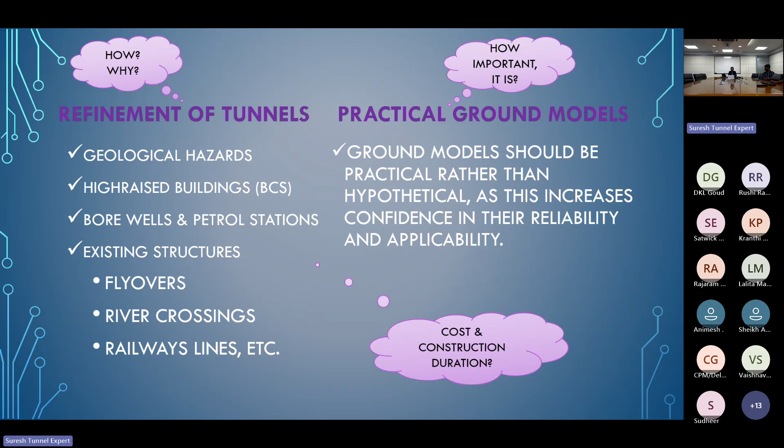Dear friends, never think this is not our cup of tea being a civil engineer. Not at all. My experience says once you're good at primary things like geological hazards, firstly work those out. Let me give you a few examples like faults, folds, bedding planes, thrust. These are all part of hazards, the first geological hazards we are able to identify. We cannot simply say this is entirely the geologist's job and I'm not interested. This is also part of our job. Being a civil engineer, we have to identify those things.

Afterwards, let me go to the second chapter. Why? Because the tunnel alignment always interfaces with geological hazards. Let me give another example: if our fault axis is in an upward direction and our tunnel axis is in a different direction, and if it is parallel, it's not at all safe. The reason being, in the IS codes and European codes as well, it creates massive surprises, the rock gets crushed and cavities take place. Such cases you primarily have to identify, and accordingly find the alignment.

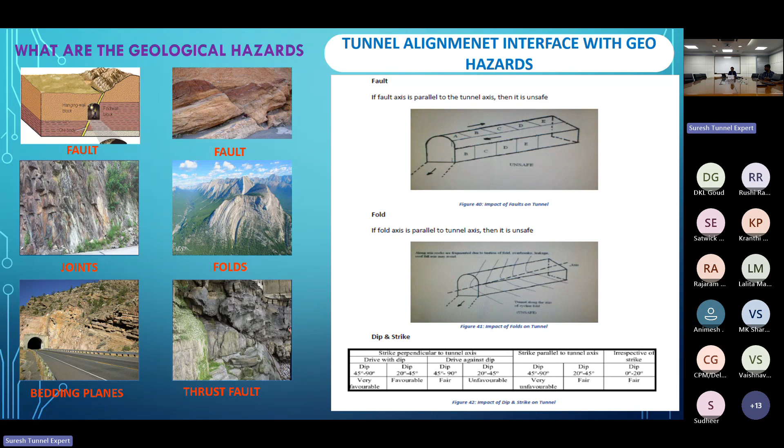The next question is how to refine the tunnel alignment when there are so many geohazards. This is something we can do completely in-house. There are two things we can do: one can easily download GIS district resource maps from the GIS website, or we can buy it.

Identify all the geological hazards where we've done the geological groundwork. Then use QGIS software to refine it and identify all the major geological hazards like landslides, faults, shear zones, and most other geological hazards at this level. This is completely in-house work we can do.

Once that is done, the next step is geological mapping. This is very key and is the backbone of the work. It's the most important thing for tunneling as well. The reason being, when we assume something, we work out something, but what actually happens at the site level may differ. The experts go and identify all the things through geological mapping, and they give good GPS coordinates, and accordingly we proceed.

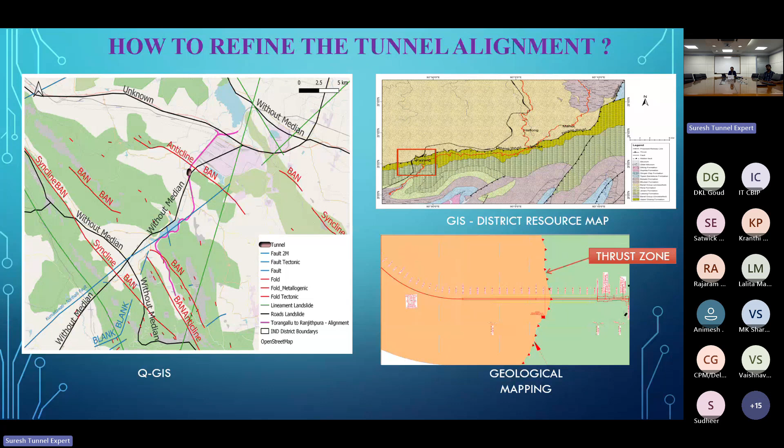That is primarily what an engineer is supposed to identify - that's part of NATM. Now let's move to the TBM cases.

As I said earlier, most TBM routes pass through infrastructure like flyovers, rivers, and bridges. For example, I encountered this somewhere in a metro project, where literally both our tunnels passed underneath a bridge, a flyover which was a very aged bridge - this is the configuration we encountered. Then the client said, please refine the alignment.

Then what I do is simply say I have three options: one is the analytical, another is a closed form solution, and the final one is a numerical one. This is the only alternative we can do. We try to use any one of them, especially numerical analysis, where the FEM plays a big role. Why?

Because if there are two tunnels, we cannot generate CFS equations to get good results. That's the reason there's no doubt numerical FEM analysis prevails in such cases. Now moving from geologist to engineer - we cannot expect a geologist to do this kind of refinement, so being an engineer, we're supposed to do these things.

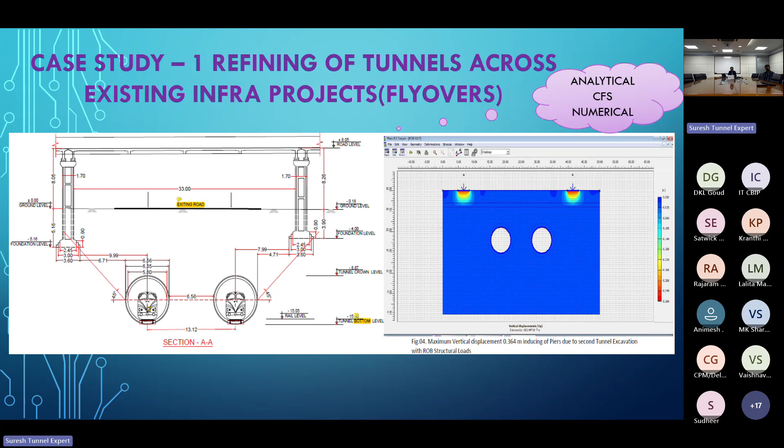Other one is, as I said earlier, not only tunnels but cut and cover is also part of us. Cut and cover and underground stations, these are all part of us because we are all underground structures. We cannot stick to only tunneling; cut and cover is also part of us.

Cut and cover means cuts depend upon the depth criteria or diameter of the tunnel. When open cuts happen, especially in mountain areas, I believe we should try to avoid it. The reason being there's flash flood risk, among other reasons, so we cannot suggest open cuts. Instead, you may recommend cut and cover. This is what my experience says.

In such cases, primarily we are in a deeper stage also - we have to estimate what is possible and what is not possible. That is also part of us. This is the way we have to refine the cut and cover type tunnels and open cuts as well.

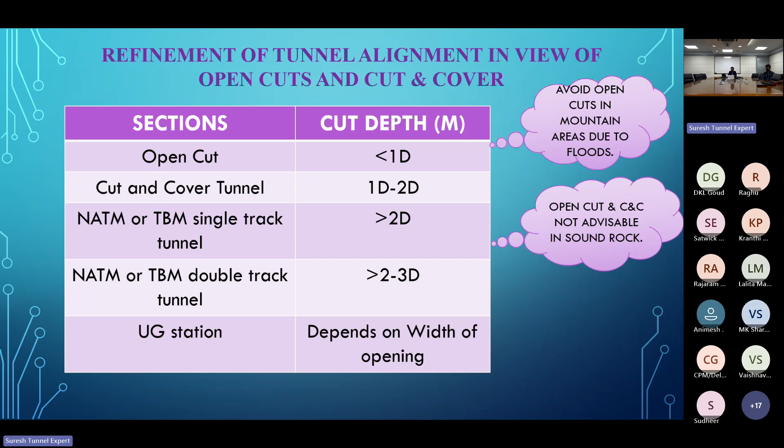This, my friends, is another case study for one of the metros. All of you who worked in metros know this - once the elevated corridor finishes off, then our underground starts with open cut or cut and cover. In very busy places where the density of people and buildings is more, and roads are very important, such cases we cannot put very long open cuts.

The reason being, if somebody recommends longer open cuts, we try to tell the client it's not feasible. Because of this open cut, we have to arrest everything - there's no people movement at all. Firstly, because it's open to the sky, and second, we have to divert the traffic. These are all issues one has to primarily consider when working on tunnel alignments or route alignment.

Dear friends, we should consider open cuts, cut and covers, and underground spaces, especially temporary structures. This is also part of us, so we cannot avoid these kinds of things. Especially cut and covers are literally possible.

Why? Because we cut it off, then we fill it off. Still, it depends upon the deeper cuts - we cannot do it like a double track cut and cover if that is massively required. Such cases one has to very carefully examine, and accordingly we have to refine the alignment. Thank you, other one please.

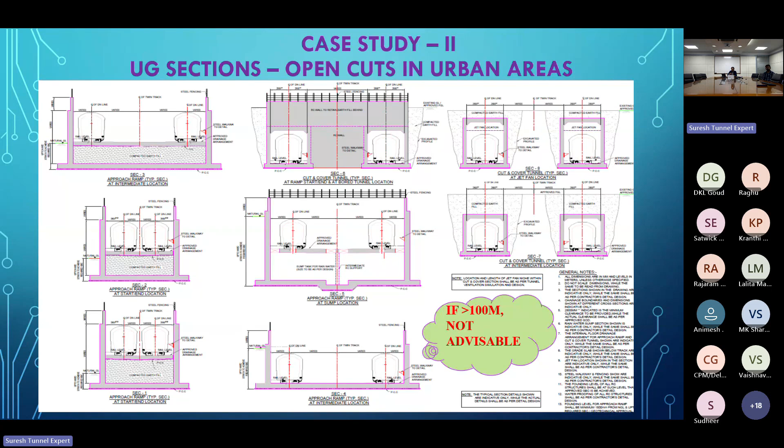I think so far I've covered how to refine the alignment. I hope it made some importance for that. Now I would like to go more into design, but structural precast segments and steel segments - those things I do not want to discuss at the moment. The basic things, how it works out, this is what I would like to emphasize now.

What I would like to say, dear friends, is NATM is design as you go. Nobody can guarantee or say their design is correct. The reason being, we usually use two ground models - one is Mohr-Coulomb and the other is Hoek-Brown for FEM analysis. Based on that, we give some support system. We design models - empirically we estimate, analytically we estimate, FEM we estimate, and yes, CCM also we can estimate.

So we're estimating something, and that has to be justified actually by the face log zone - meaning practically what the face log, the geological face map is, that is actually correct. So we have to change our design models. Practically, we have to agree that however good we are hypothetically, that plays a little role, but practically instrument monitoring also plays a big role. These are things we cannot avoid - we should completely rely on that.

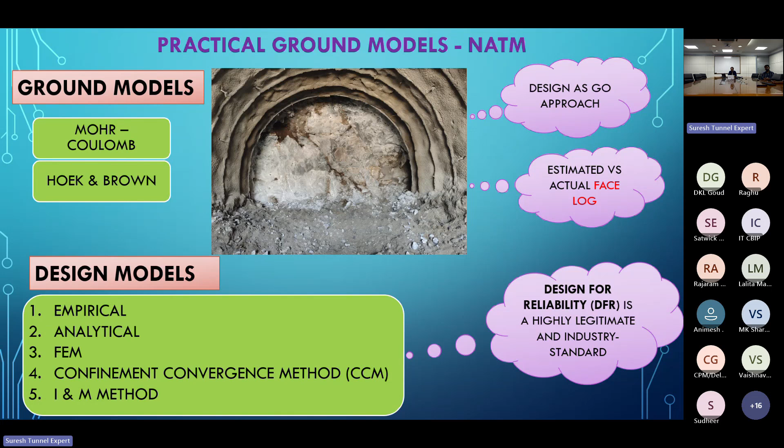So what I want to make a point of is: you design whatever hypothesis, but that has to be synchronized with your practical approach. Eventually you take a call such as instrumentation monitoring method. Let us say you design something. End of the day, the instrument monitoring during construction and post construction tells us exactly how the structure behaves. That is the reliability we are supposed to be able to establish. This is what about it.

Let me give one case study. Regarding this, I had a good discussion with a friend of mine, Mr. Rishabh Gupta, who is from RITES also. He is a very well-known tunnel designer. So we had a good discussion about these things.

Especially for tunnels, at the beginning of the tunnel portal, there are two things coming. One is we have to specially design for the tunnel portal class for a certain distance either side of the portal. Let's say for namesake, I'm given 5 or 6. Yes, this is well and good as an estimate, but practically when you go to the site, it may change. Are we still adapting what we designed? I don't think so. Safety is a paramount priority, but ground reality says different - meaning yes, that can be avoided. This is what my experience says.

What I say is from my experience - I'm not making it mandatory at all. This is what I would like to talk about. Especially young engineers, when they go for this, these are the things they have to notice - how to bring practicality into actual design and make it reliable. I'm again emphasizing reliability. Once you give confidence and reliability, then only the reliability factor increases. Then only will investors also increase investing more into infrastructure. If there is no reliability, we cannot expect more investors as well.

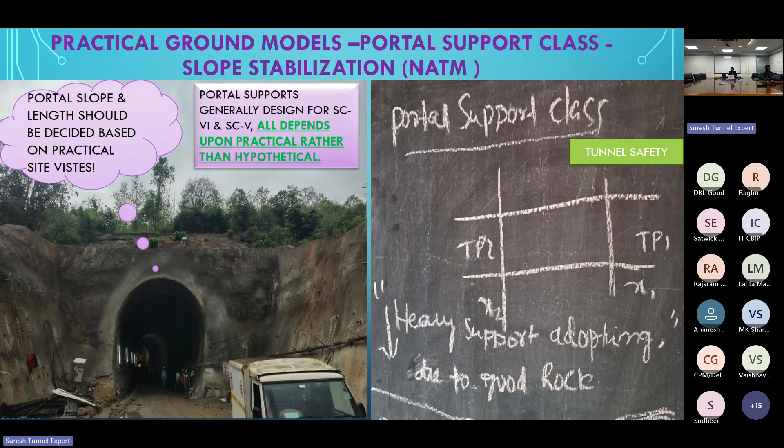Please go to the next one. This is a more sensitive slide, so we'll talk about it a little carefully. The reason being this is purely about TBM and underground stations. Dear friends, I've worked on both - one is TBM, one is precast segment. Usually we may see this in India. The other one is steel segments, like a steel segment.

When I was in London, I worked on underground tunnels for about 2 years. We used to inspect those tunnels, and then for reassessment we did the designs. It gives good experience, there's no doubt at all. The reason being, they did not use TBM, they used the NATM concept. And then they used instrumentation monitoring. So in such cases it works out.

But when you come to precast segments, generally instrumentation monitoring won't work because we cannot measure how much deformation is actually coming in the precast segment. The only option we have relates to other things like face pressure, volume loss and everything in the segments. In such cases, instrumentation monitoring also plays a big role, to a large extent, above the tunnel only - if the tunnel is not able to take any loads, then definitely the surface instruments can predict that, using MPBX and other instruments as well.

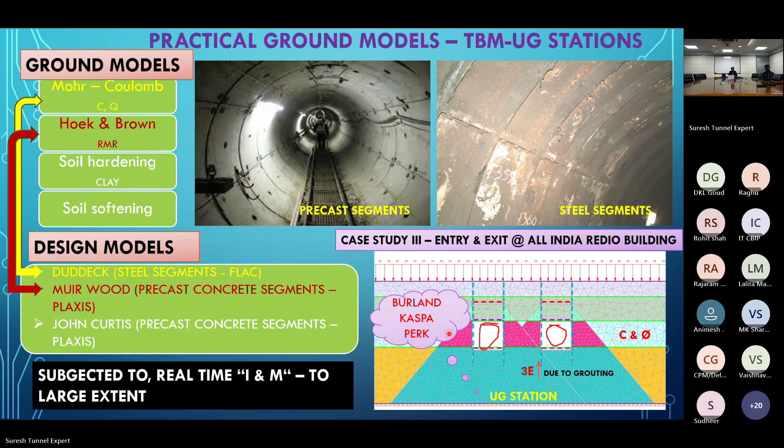As a tunnel designer, especially for NATM tunnels, face stability plays a big role. I would like to emphasize this in a tricky way, so please try to understand. Whenever there are C-phi soils, we normally believe there is a wedge model, developed based on the equation given by the engineers Broms and Bennemark.

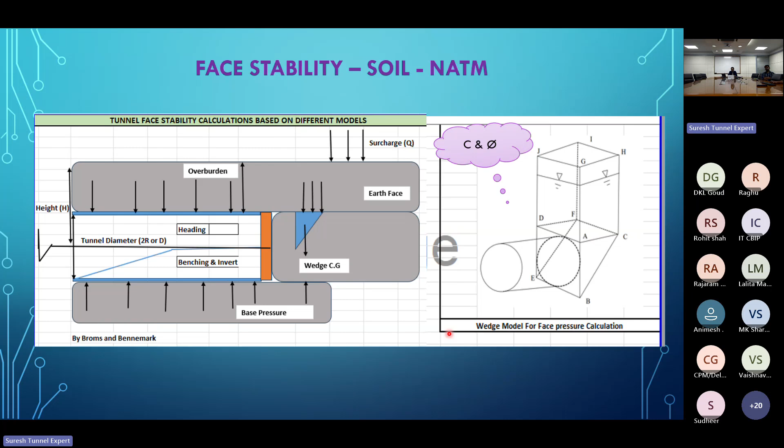Based on that, we estimate the face stability, how much length may get disturbed, or how much settlement may be induced. That's the wedge analysis for C-phi soils. For the cohesive soils, I used the Mair method, practically for one metro project case study. Eventually we got about 52 mm settlement, which was a little on the higher side. Generally we restrict vertical settlement to about 25 mm per code.

For underground stations, horizontal settlements we can allow up to 40, as some codes say, though that's from a UK perspective. Here you can prove it off too, and the best way to judge is through instrument monitoring. So what I want to point out is that face stability for NATM tunnels in cohesive soil works out using Mair's method. But what about when the rock strata comes?

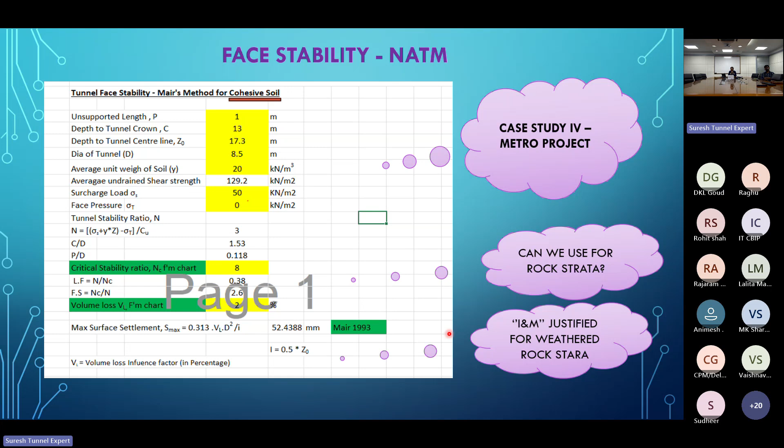In NATM, rock strata may come predominantly. In such cases, can I go for these equations? I would say rather no, especially for weathered rock strata conditions. You may presume certain values, but we still have to justify our presumptions with the help of instrumentation monitoring. Practically, one can only justify this using these techniques. That's what I wanted to tell about this slide.

Next, in case of NATM tunnels, face stability; in case of TBM tunnels, face pressure. Let me give a good case study here. Assuming a C-phi soil, I used Terzaghi's silo theory and estimated some face pressure. Literally, when I used that face pressure, we encountered massive settlements. So we rethought it and changed the model.

We changed to another model and used Anagnostou and Kovári. Then we got very good face pressure results, and the induced settlements reduced drastically. This shows everything is practical - if model A doesn't work, you move on to B. We can never stick to A only. So how could I say which is correct? The only option is tunnel deformation and instrument monitoring results.

In case of tunnel deformation or lining deformation, I may not guarantee full accuracy, but at least surface settlements we can justify using instrumentation and monitoring results. That's what I would like to say.

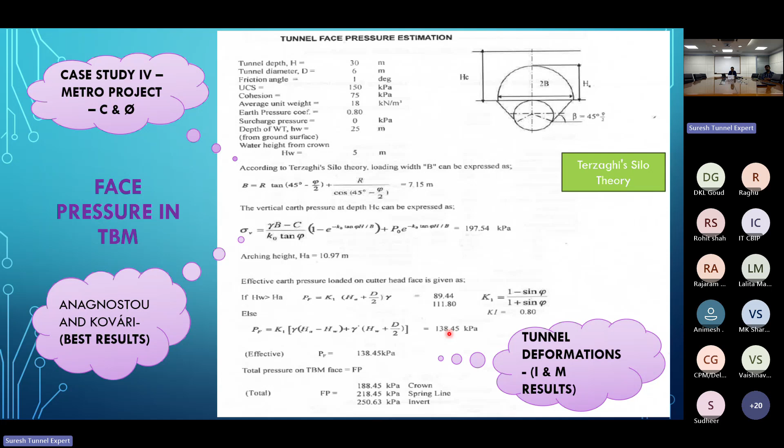Finally, when sticking with TBM tunnels, there are four parameters one has to design very carefully from a practical point of view. For example, designing TBM torque around 45,000 kilonewtons, we also have to estimate theoretically. The torque literally depends on the face pressure. Face pressure interlinks with volume loss, and volume loss causes settlement. So all these are synchronous and interlinked, and one has to estimate very carefully.

For example, for a single tunnel, I can use a closed form solution to estimate settlement and volume loss. But for a double tunnel or staggered tunnel, one should go with FEM only, because there's no other option - closed form solutions don't give good results when interlinked with multiple tunnels. That's what I wanted to tell about this slide.

Somewhere FEM prevails, sometimes real-time monitoring prevails. So eventually, what we design has to be mostly linked with real-time monitoring. This is how we give reliability to our designs. That's what I feel about it.

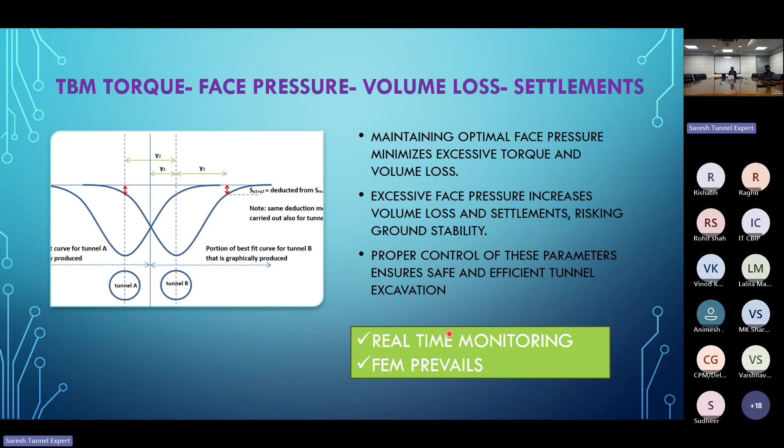I hope I made it somewhat clear, covering most of the massive and major design parameters, especially in case of NATM and in case of TBM. Thank you very much.

Volume losses - this is a very good question, a very repeated question. I've been there, but let me put it this way. Whatever back volume calculations we can do, how we do it means before you estimate something, you can consider 0.3 or 0.5, whatever.

So in any attempt you will go for 2%. But especially for TBM tunnel, when you assume something, let the tunnel mining go on. Then when you go to the site, we can take how much face pressure they were having. Then, through back calculation - knowing the face pressure and the settlement already - you will get the actual volume loss per ton. Actually, I'm having that slide, but I did not show it.

With the same thing, how much - say I'm designing thrust force also as 5,000 kilonewtons. But actually how much I'm using, you will come to know when you go to the site, because you take the value and can estimate based on how much face pressure they are actually applying.

So that's what I'm saying - you presume something, then one has to go to the practical site, go to where the mining takes place, take the values like face pressure values and re-estimate. Why? Because the volume of the tunnel we know already, especially for volume losses. What happens is the volume of the tunnel is known already - let us say 6.2, whatever, some meters per cum.

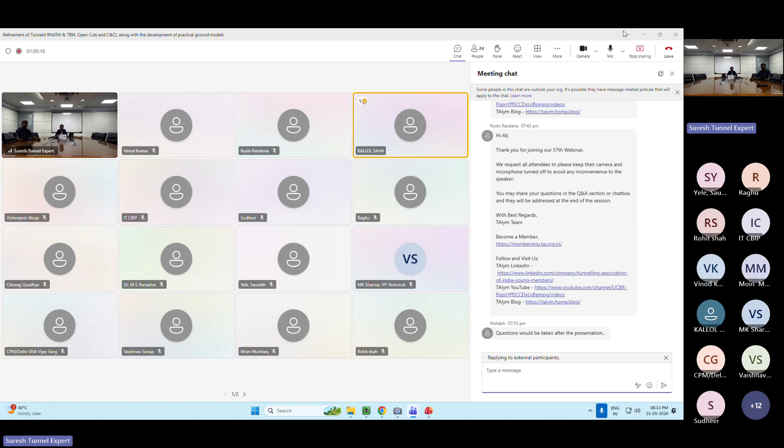So actually, you have correlated Hoek-Brown with Mohr-Coulomb, and then Mohr-Coulomb with Duddeck. So is there any reason - can I use Hoek-Brown with Duddeck, and is there any specific reason that you have correlated Hoek-Brown with Mohr-Coulomb and Mohr-Coulomb with Duddeck?

Sir, what is the reason this happens? Is there a compatibility issue coming? Let us say when you design, say c-phi soil - generally, immediately we go for the Mohr-Coulomb estimate.

For Duddeck case, normally where there is clay, Duddeck developed most of the cases in the London area, so they used that method. Whenever rock is coming, we have to use Muir Wood. So every time the client asks what is best, it means compatibility only. This is what I would like to say. Like, I estimated using Muir Wood and Curtis.

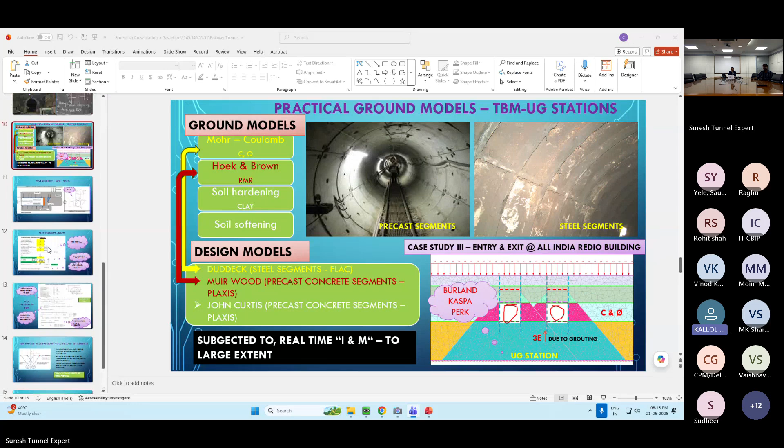And so at the last, I think you showed one graph with the heading of TBM torque, face pressure, volume loss. What does this graph actually show? Can you please explain a bit?

What I would like to tell you here: whenever there is a two-TBM configuration, let us say one TBM configuration, we generally estimate most of the volume losses, face pressure, everything based on equations. But when there is a two-tunnel configuration, we may not estimate using a closed form solution, meaning multi or staggered tunnels. In such cases, FEM prevails. Then the question is how the TBM torque you will actually put into your FEM analysis.

I would say we cannot put the TBM torque into the FEM itself, but back calculations we can do. Let us say, based on our FEM analysis, we estimated some deformation. Again, I'm designing a tunnel using a TBM with 45,000 torque, but in practice how much is coming, we know, because how much face pressure in bar, we know that. Accordingly, we can back calculate the torque. Everything is interlinking, which is inducing settlement. This is what I would like to say.

Okay sir, got it sir. Thank you sir, thank you.

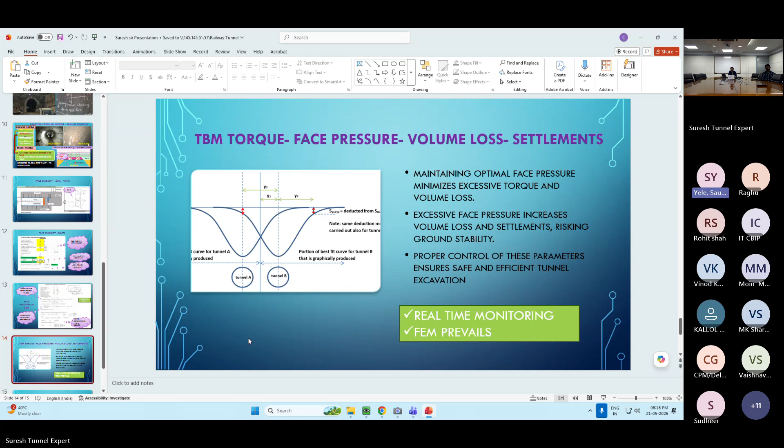Any other question? I believe no one is raising. Yeah, MS sir, please switch on your mic. Yes, sorry, actually I was traveling and my network got disconnected.

Please sir, the previous question I had asked. Your voice is not clear, based upon what... Hello, MS sir, your voice is not good, it's breaking a little bit. Hello.

Maybe you can put your question in the chat box. Hello. Am I audible? Yes, please. I think his network got disconnected. Maybe we will share the question with you via mail. Always welcome, please share it. Very soon I'm going to give another seminar also.